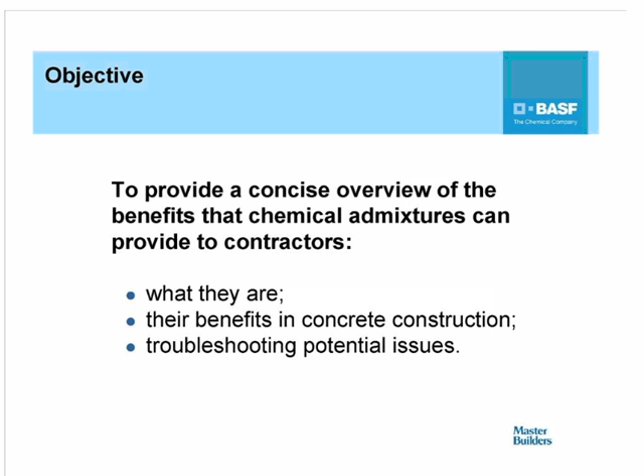So let's start off with the big question: what is an admixture? Believe it or not, there is an official definition for what an admixture is. Essentially, it is any ingredient added to a concrete mixture other than Portland cement, water, aggregates, and fibers. Other than these materials, chemical admixtures can be broken down into two different classifications.

What we call chemical admixtures are typically either in liquid form or powder form, and these materials are typically added in very small quantities relative to the other materials in concrete, such as the Portland cement or the aggregates.

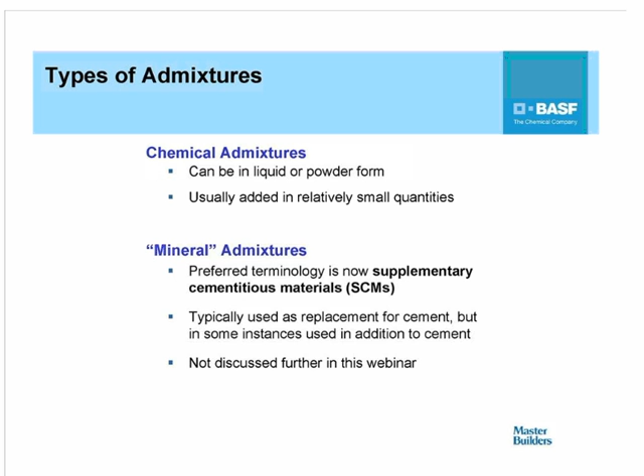In addition, we previously used the term mineral admixtures, which basically referred to what we now call supplementary cementitious materials, or SCMs. These are materials such as fly ash, either Class F or Class C, as well as slag cement, metakaolin, or silica fume. These materials will not be covered in this webinar; the primary focus will be on chemical admixtures.

Now, the big question is, why do we need chemical admixtures in concrete? Well, it turns out we use them to enhance the properties of concrete, and in some cases mortar, in either the plastic or the hardened states.

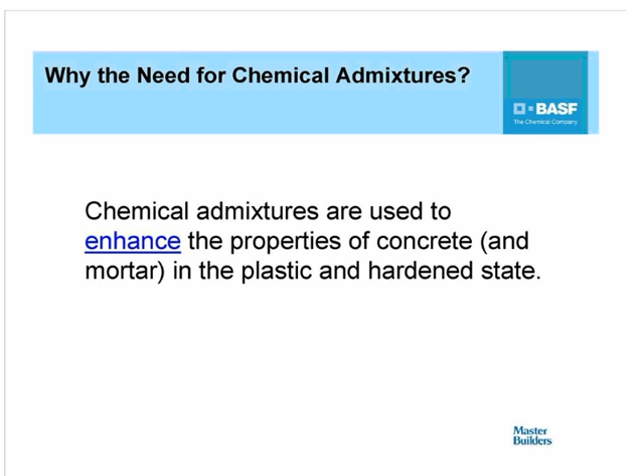The benefits they provide for fresh concrete include: one of the primary reasons chemical admixtures are used is to decrease the total water content of the concrete mixture, with significant benefits that come from doing so. Another reason for using chemical admixtures is to increase the workability of concrete, making it easier to place, consolidate, and finish.

We also use chemical admixtures to either retard or accelerate the time of setting of the concrete, depending on the time or the particular season. We can also entrain air in concrete using chemical admixtures.

Other benefits include reducing segregation, reducing the rate of slump loss, and improving pumpability, placeability, and finishability of concrete. Finally, we can also use chemical admixtures to modify the rate or amount of bleeding that occurs in concrete.

Now, in the hardened state, the benefits of chemical admixtures can be summarized under three bullets: primarily, we can use them to increase strength, to increase durability, or to improve aesthetics.

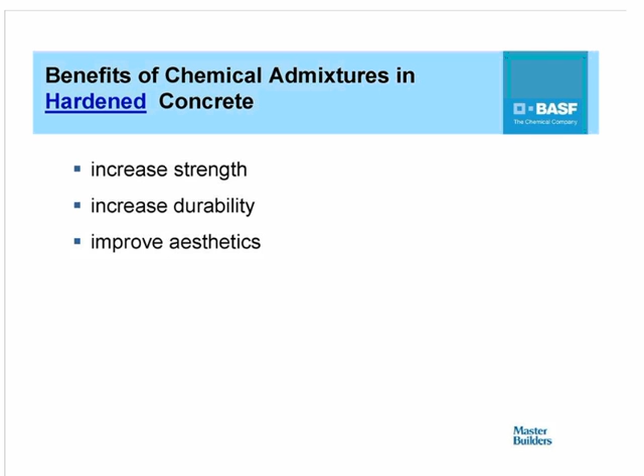Now, these are the main classes of chemical admixtures that exist. I've divided these under water-reducing admixtures, which form the largest grouping of admixtures used, followed by set control admixtures. Then we have a broad class of admixtures that fall under what we call durability enhancing.

These are materials used to help the concrete withstand environmental conditions during service. Finally, there are some miscellaneous chemical admixtures, such as viscosity modifiers and rheology control materials, coloring admixtures, and so on, that also exist.

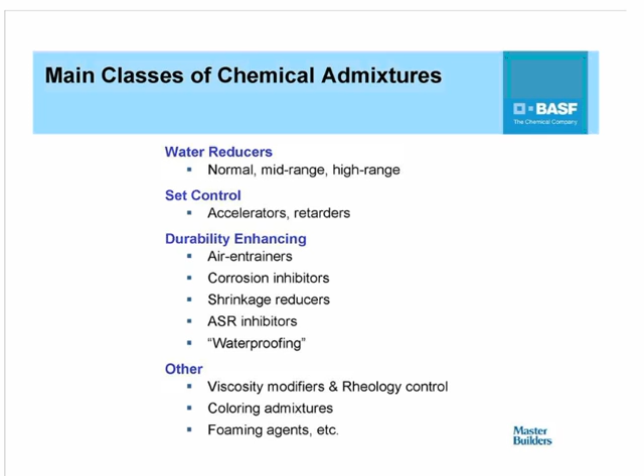All of these admixtures are typically governed by industry standards, specifically the ASTM standards as well as the AASHTO standards for those involved in paving applications. The two main standards that exist for chemical admixtures are ASTM C260, with the AASHTO equivalent being AASHTO M154, and this particular standard covers air-entraining admixtures.

Now, the bulk of admixtures fall under ASTM C494. The AASHTO equivalent is AASHTO M194, and this is basically the main bible for chemical admixtures.

Now, within ASTM C494, there are different types listed, and up until fairly recently there were just seven types, going from A through G. Type A's, as most people call them, are the water-reducing admixtures.

Then we have Type B, which is retarding; Type C, accelerating; Type D, water-reducing and retarding; Type E's, water-reducing and accelerating, so these have accelerating components to them. Type F is water-reducing high-range, and Type G's are water-reducing high-range with retarding components.

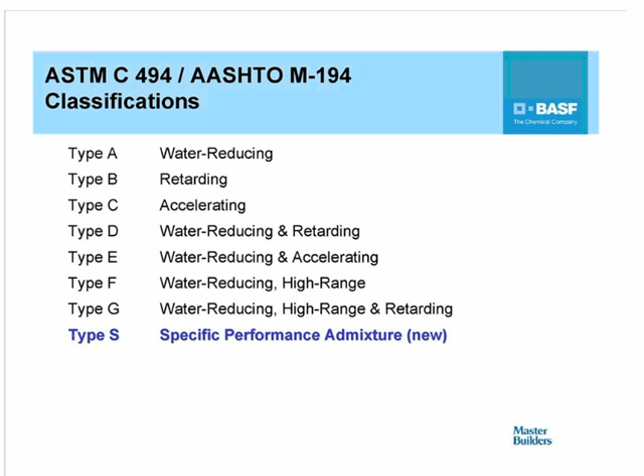Now, several years ago, a new type was added, Type S, for specific performance admixtures. This is supposed to cover admixtures that neither provide water reduction nor affect the setting characteristics of concrete. Under this classification, admixtures such as rheology control or viscosity modifying admixtures, and shrinkage reducing admixtures, will fall under this particular Type S category.

So I'd like to ask the question from the contractor's perspective, since we're trying to do this presentation from the contractor's point of view. I put down a few bullet items.

Most contractors would want concrete that arrives consistently at the job site with the desired slump and air content where applicable. The concrete should maintain slump and workability throughout placement if possible. It's got to pump well and respond well to consolidation and vibration, as well as finish well in flat work applications.

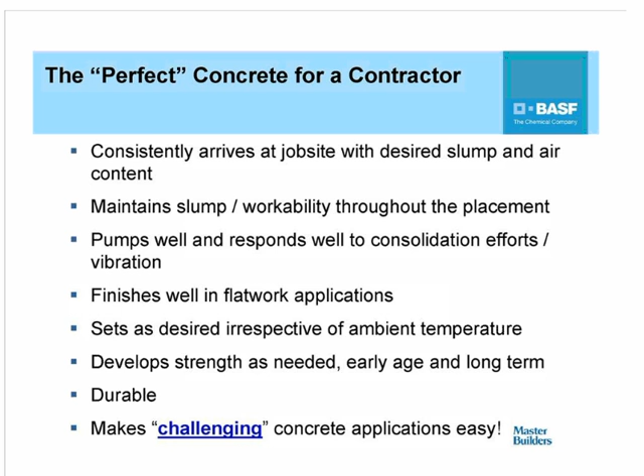Most contractors would also want the concrete to set at the time they like, irrespective of ambient conditions, preferably with the same setting time all year round if working on a project that extends over the seasons. It's got to develop strength as needed, both early age and long term, and it has to be durable. Finally, most contractors would want concrete that makes challenging applications fairly easy.

Now, when it comes to proportioning and producing concrete, there is always a balance between workability and strength. On one hand, the contractor needs workability, both initial and over the placement period, to get the concrete into place without too much problem.

One of the things that helps with workability is adding more water. Before the advent of chemical admixtures, one way of increasing workability was to add more water, or to add more cement to the mix and increase the water content accordingly.

On the other hand, from a strength perspective, the concrete producer wants less water, because reducing water content increases compressive strength, both early age and long term. So it appears as a conflict: the contractor wants more water to improve workability, while the producer wants less water to improve strength.

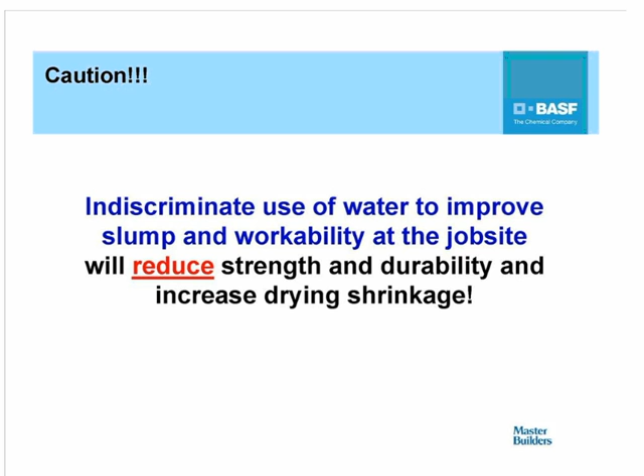At this point I'd like to bring up a caution: the indiscriminate use of water at the job site to improve slump and workability will invariably reduce the strength and durability of the concrete, as well as increase drying shrinkage. So as much as possible, the best approach is to keep the water content as needed and find other ways to improve slump or workability.

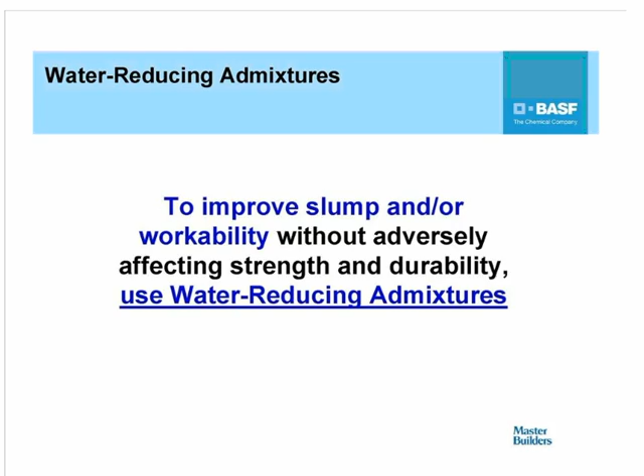This can be done fairly easily through the use of water-reducing admixtures. By using admixtures, we can safely improve slump and/or workability without adversely affecting the strength and durability of the concrete in place. So let's take a look at what these materials are.

As the name implies, water-reducing admixtures are used for the sole purpose of reducing the quantity of mixing water required to produce concrete of a given consistency. That's one of the primary reasons these admixtures are used in concrete.

There are different types of water-reducing admixtures. We have the normal types, which fall under ASTM C494 Type A category, and high-range types that fall under ASTM C494 Type F category. In between, we also have mid-range water-reducing admixtures, which at this point are not covered by any one particular ASTM C494 category, but most of them do meet the Type A category.

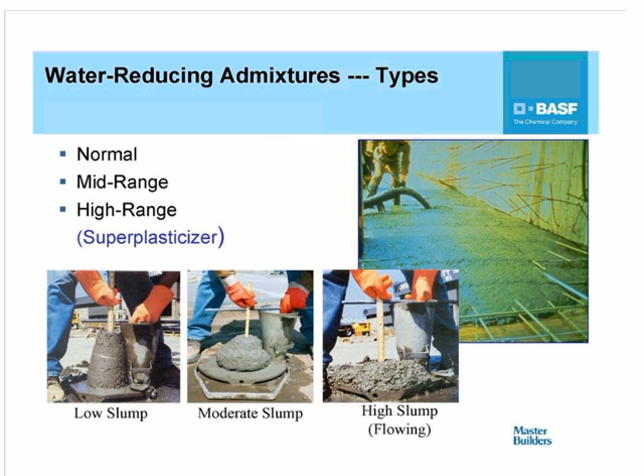With these admixtures, we can produce concrete over a wide range of slumps, from low slumps to moderate slumps to high slumps, as well as self-consolidating concrete.

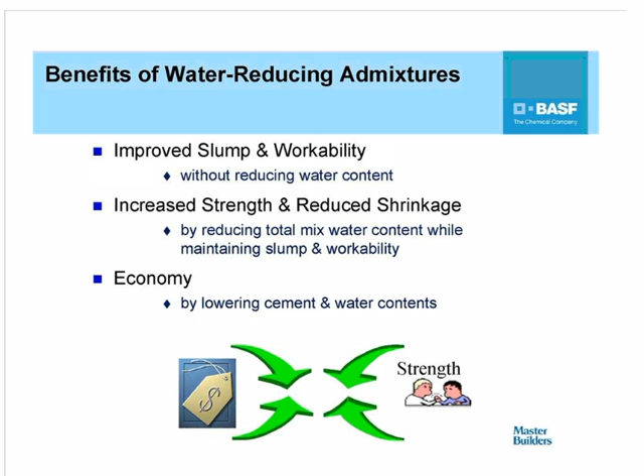The main benefits of water-reducing admixtures can be summed up under three bullets. As indicated earlier, the main purpose is to improve slump and workability of the concrete, and this can be achieved without necessarily reducing the water content. They can also be used to increase strength and reduce drying shrinkage by reducing the total mixed water content while maintaining slump and workability. Finally, they can be used to economize the mix by lowering cement and water contents without necessarily affecting strength and workability.

When we start with Type A, or normal water-reducing admixtures, these by specification have to provide a minimum of 5% water reduction when used in concrete. They're used primarily in concrete that would typically have slumps of no more than about 5 inches, and can also be used synergistically with other types of admixtures within the concrete portfolio.

The typical dosage ranges of these admixtures will be anywhere from about 2 to 5 fluid ounces. In some instances, as we go to higher dosage levels, 4-5 ounces and beyond, we find diminishing returns with respect to additional water reduction. However, as you increase the dosage, you also increase the potential for retardation as well as bleeding.

With water-reducing admixtures based on lignins or lignosulfonate salts, as they're more known, you may also run the risk of increasing the air content of the concrete. Obviously, all of these can have an impact on early age strength development.

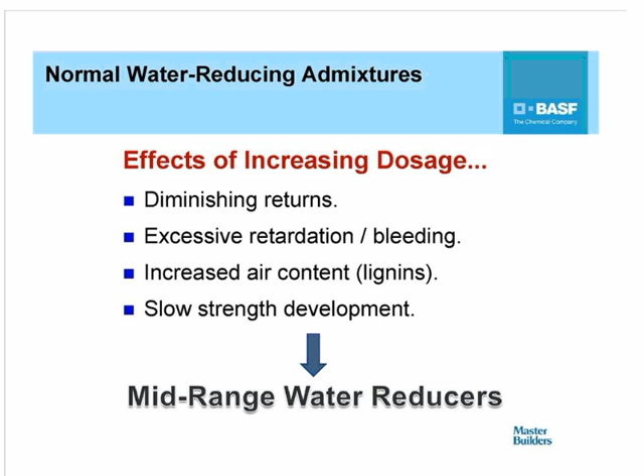This was one of the reasons why mid-range water-reducing admixtures were developed. Even though there's no specification, they typically provide water reduction between that which we get with normal water reducers and what we get with high-range water reducers. So in effect, they provide water reduction between 5 and 15%.

They work extremely well in the mid-range slump of about 5 to 8 inches. The dosages of these materials can range anywhere from about 3 to 15 fluid ounces per hundredweight, depending on the chemistry of the material.

They are designed to have controlled setting characteristics even at higher dosage levels, and can be based on lignosulfonate salts, lignins. Some of the newer technologies are based on newer admixture chemistry, dispersant chemistries, which are the polycarboxylate ether technologies.

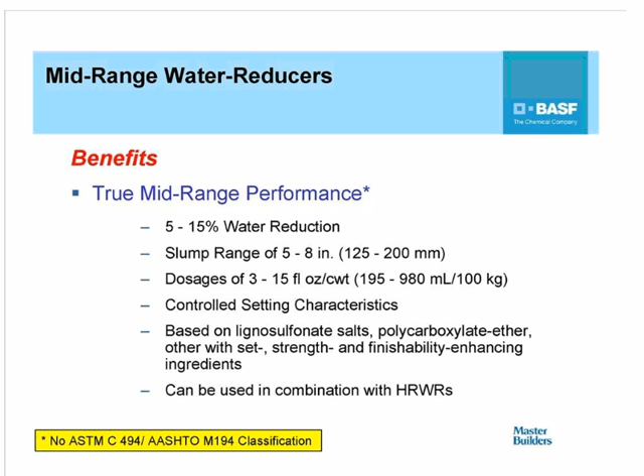In addition, most of these mid-range water-reducing admixtures also contain what we call set balancers, as well as strength and finishability enhancing ingredients. They can also be used in combination with high-range water-reducing admixtures to provide synergistic performance.

The benefits of these mid-range water-reducing admixtures lie in the excellent finishability they provide, especially in lean and harsh mixes, working with supplementary cementitious materials. Mixes that tend to be sticky can benefit from the use of most mid-range water-reducing admixtures. Typical applications for these materials include flat work, curb and gutter, and so on.

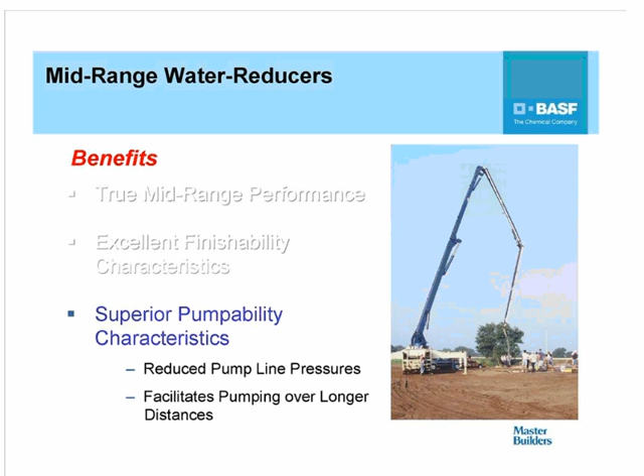One of the other benefits of mid-range water-reducing admixtures is that they provide superior pumping characteristics when used in concrete, which results in reduced pump line pressures and the ability to pump over longer distances because of the effect they have in reducing pump line pressures.

However, there are some potential issues with these materials as well, and these are typically product dependent. This includes retardation at higher dosages, as well as undesirable air contents when they're used at relatively high dosages.

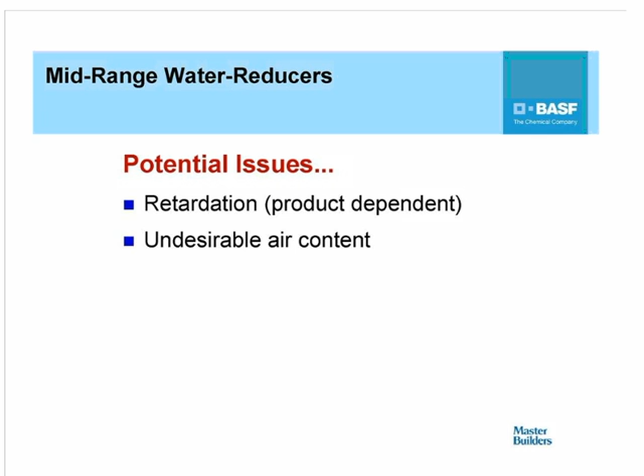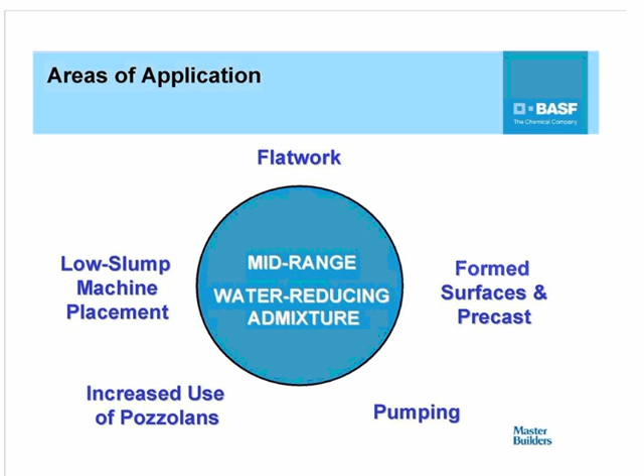So these are just some issues that are typically looked out for with the use of mid-range water-reducing admixtures. But for the most part, they're used very widely within the industry in applications that range from flat work, formed surfaces and precast, pumping, low slump machine placements, as well as areas where increased use of pozzolans occur. This is again because of the impact they have in reducing stickiness of concrete in the mixes.

Now the last category under water-reducing admixtures is the high-range water-reducing admixtures, or as they're more commonly known within the industry, superplasticizers. These admixtures, by specification, have to provide a minimum water reduction of 12% when used in a concrete mixture. Most of them actually provide water reductions much greater than that, and in extreme cases we can get as much as 40% reduction in total mixed water content.

The main benefit of high-range water-reducing admixtures is that they're used in producing flowing concrete, so these are concretes that have slumps of 7.5 inches or greater.

The ideal slump range for most of these materials will be 8 inches or greater. And they can be added either at the batch plant or at the job site.

Initially, when these materials were developed, based on first and second generation technologies, they were based on lignosulfonate salts, which had very short pot life. As a result, job site addition was the preferred method, because once added and mixed into the concrete, it could be placed right away.

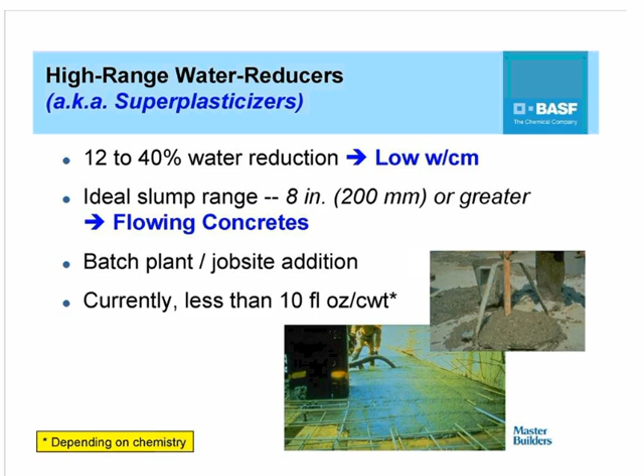The main benefits of high-range water-reducing admixtures lie in the fact that they provide significant water reductions, as we saw on the previous slide, anywhere from about 12 to 40%. As a result, they are the main admixture of choice in producing high early as well as high ultimate compressive strength concrete.

They are also the admixtures of choice when producing concrete with low permeability or increasing durability. And they provide more effective use of cementitious materials in concrete.

In addition, the other benefit of high-range water-reducing admixtures is that they can be used to provide high slump and workability, which can result in faster discharge, pumping, and placement of concrete, as well as reducing the effort required to vibrate concrete in place.

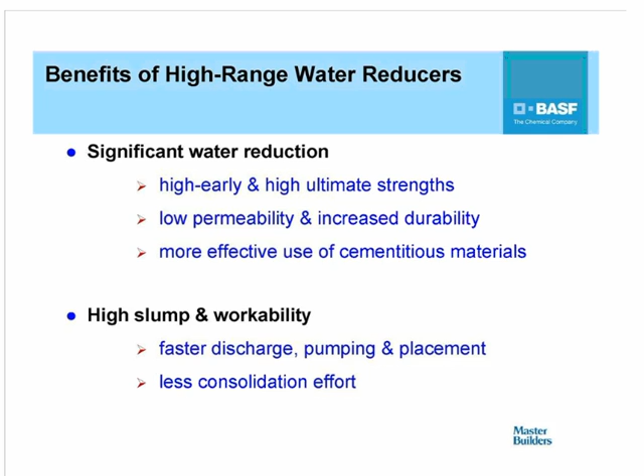However, just like any of the other admixtures I talked about so far, there are some potential issues, which could be segregation if the dosage used is not in balance with the total water content of the mix.

In addition, especially with the older technologies, high-range water-reducing admixtures can potentially lead to some amount of retardation. This is not that much of an issue these days with the newer polycarboxylate ether technologies.

Also, high-range water-reducing admixtures, when used at lower slumps, can lead to erratic performance. Years ago, some state agencies would permit the use of high-range water reducers but then limit the slump to no more than 5 inches, which created a lot of havoc with respect to slump and performance.

These days, I think most agencies understand that these materials have to be used at much higher dosage and much higher slump levels, and are open to that.

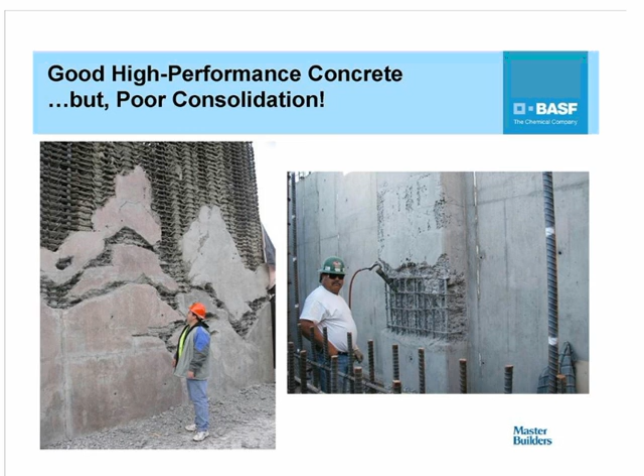Now, obviously, having high slump does not necessarily mean that we may be able to achieve extremely good consolidation in the forms, depending on how congested the reinforcement is. One of the things this has led to, facilitated by high-range water-reducing admixtures, is self-consolidating concrete.

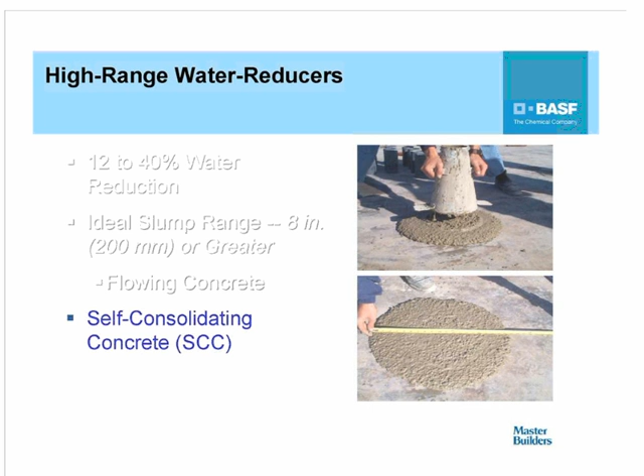Self-consolidating concrete, by definition, is a highly flowable, non-segregating concrete mix that can flow into place, fill the formwork, and essentially encapsulate the reinforcement without any mechanical consolidation, or, if required, very, very little mechanical consolidation.

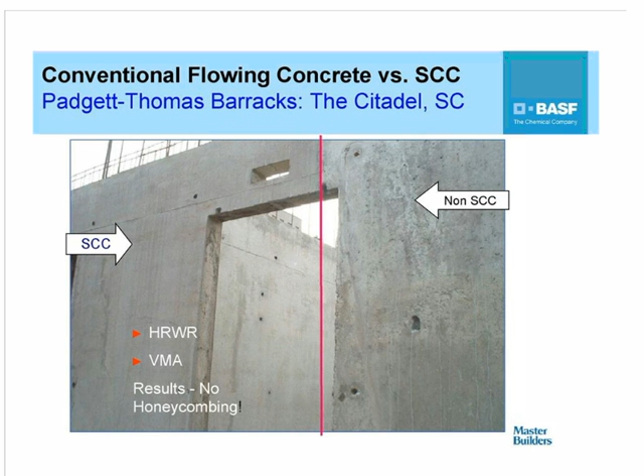With self-consolidating concrete, the surface finish can be significantly enhanced, and sharper edges can result, even though the concrete may not be vibrated. On this particular project, where there were a lot of architectural details, the use of self-consolidating concrete resulted in extremely good finish in the final structure.

Self-consolidating concrete has also been used, and is being used quite extensively, in mat foundations. It was used on the Burj Khalifa in Dubai, and in the U.S., Skidmore, Owings & Merrill specified it for the Trump International Tower and Hotel project in Chicago back in 2005, where a total of 4,600 cubic yards of self-consolidating concrete was placed in 22 hours continuously. The mat was 198 feet long by 60 feet wide and 10 feet deep.

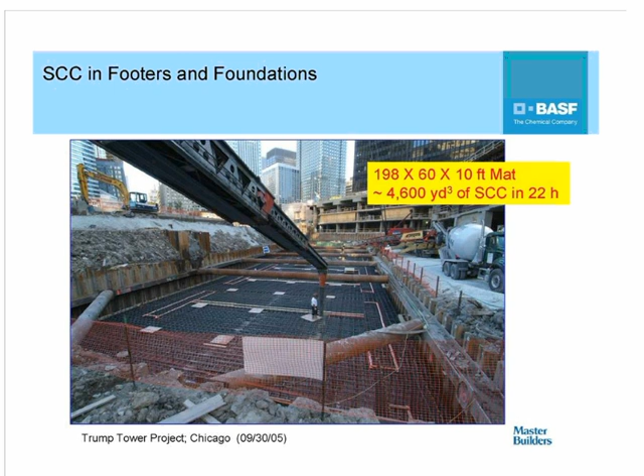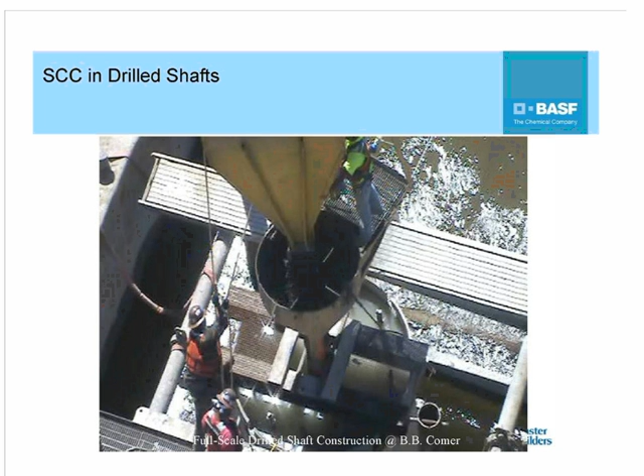With self-consolidating concrete, it's been shown that the concrete can rise uniformly within the shaft because of the high fluidity of the mix, resulting in very, very few defects.

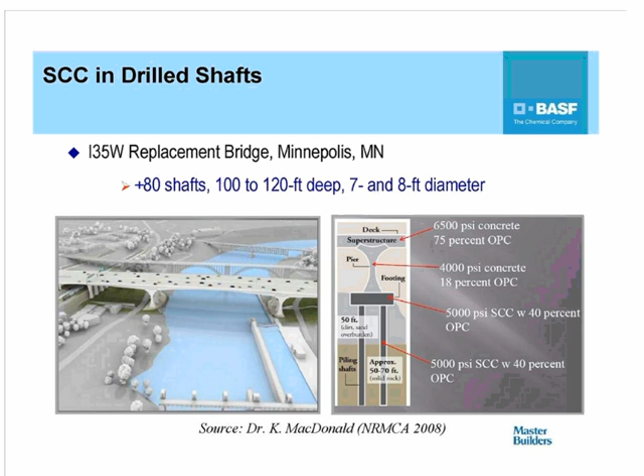One of the projects where self-consolidating concrete was used extensively was the I-35 West Replacement Bridge in Minneapolis, Minnesota, a few years ago, where all of the drill shafts on this particular project were basically cast using self-consolidating concrete.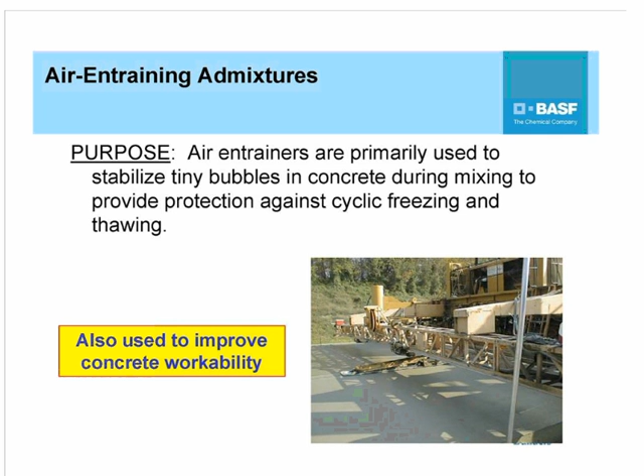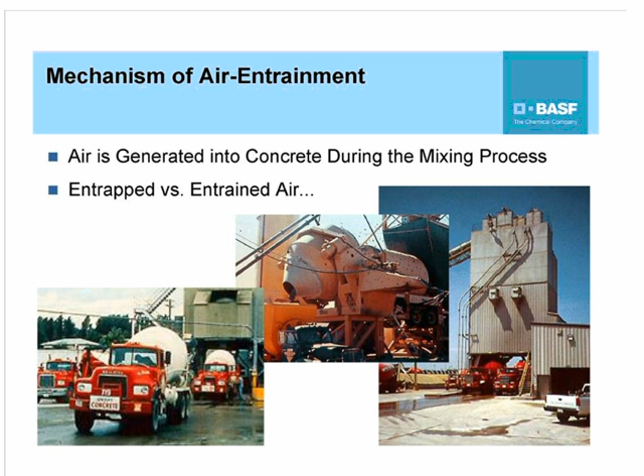Air entraining admixtures also help improve the workability of concrete because of the ball-bearing effect they provide. The air is generated into the concrete during the mixing process when air entraining admixtures are used, and they form air bubbles that are spherical in nature, as opposed to the irregularly shaped, larger entrapped air voids that don't provide any benefit when it comes to cyclic freezing and thawing.

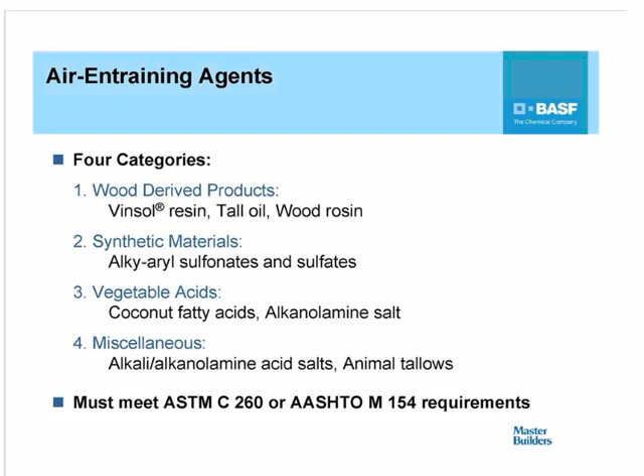There are different types of entraining admixtures in the marketplace, and entrainers are governed by ASTM C260. The entrainers in the marketplace can basically be classified under wood-derived products as well as synthetic materials. Both of these have their benefits and slight disadvantages.

With the Vinsol resins or wood-derived products, you get quick air generation, but minor air gain with continued mixing. However, over time, air loss can result with prolonged mixing. These vinsol resins and rosins tend to form mid-sized air bubbles, and most of them are formulated and compatible with most chemical admixtures used in concrete.

The synthetic materials also generate air quickly, but they're not as effective in very low slump mixes, such as those used in paving applications. These synthetic materials will have minor air loss with mixing. They generally form much smaller, very stable air bubbles when used in concrete, and they may be somewhat incompatible with some high-range water-reducing admixtures, depending on the particular chemistry.

But both of these chemistries, either the vinsol resins or the synthetic materials, are very effective in producing concrete that has very good freeze-thaw resistance.

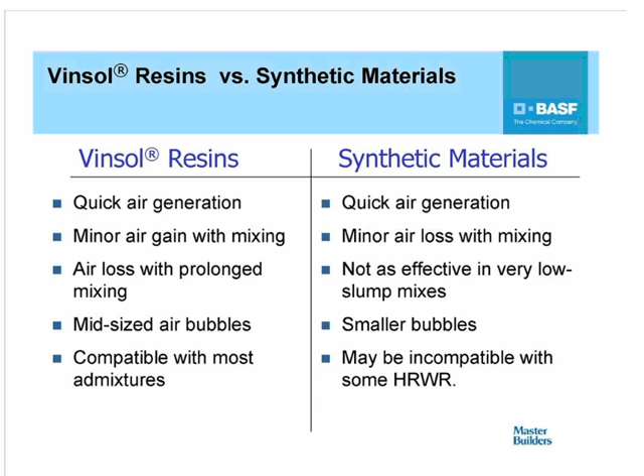The benefits of air entraining admixtures in plastic concrete include improving workability, increasing slump, reducing segregation and bleeding, producing a more cohesive mix, and in some cases, reducing the density of concrete.

In hardened concrete, the main benefit is improving resistance to freeze-thaw distress, as well as scaling due to de-icing salts. They also produce a slight decrease in permeability, which can improve water tightness as well as sulfate resistance. But for the most part, if we're interested in reducing permeability, there are more effective ways of doing so with high-range water-reducing admixtures and supplementary cementitious materials than using air entrainers.

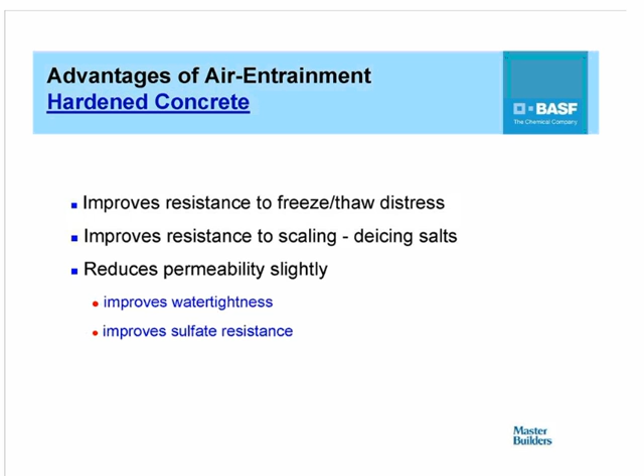Now, the disadvantages of air entraining admixtures in concrete include the fact that sometimes the mixes can be sticky, and because of the air bubbles, they tend to reduce the amount and rate of bleeding.

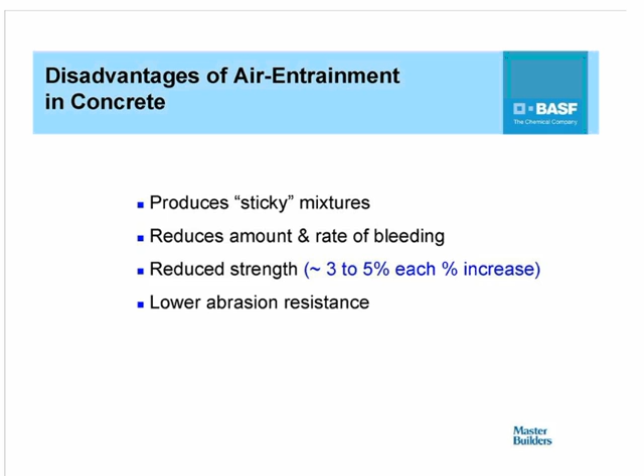In addition, air entrainment can reduce the strength of the concrete, approximately 3 to 5% for every percent increase over and above what the concrete was designed for. And entrainers may also lower the abrasion resistance, depending on the effect they have on compressive strength.

With respect to things that affect entrainment, anyone who's ever worked with entrained concrete knows that it's extremely touchy, and pretty much everything you can think of can affect entrainment in concrete. This includes things from the batch plant, such as aggregate gradation, cement changes, and the use of supplementary cementitious materials, especially class F fly ash, depending on carbon content. At the job site, things such as the addition of water, high-range water-reducing admixture, pigments, fibers, and pumping can also affect entrainment, especially if there's a vertical drop at the end of the pump line.

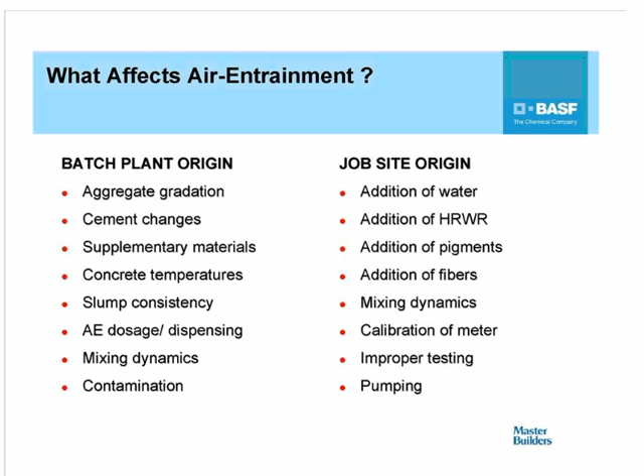Temperature affects the hydration of Portland cement, meaning that in summertime concrete tends to react much faster, and in wintertime it reacts a little slower. As a result, in summertime some issues that can arise include increased water demand and rate of slump loss, an increase in the potential for retempering at the job site, a higher potential for plastic shrinkage cracking, and if there are delays, the potential for cold joints. In addition, because of higher temperatures, concrete tends to set faster, which can lead to problems with placing, consolidating, and finishing the concrete.

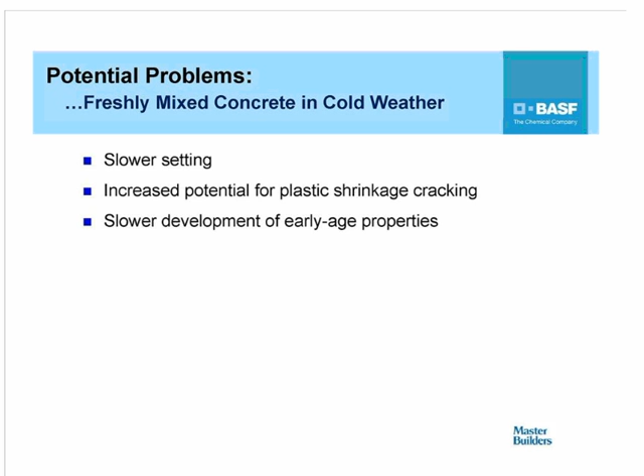With respect to cold weather, the exact opposite tends to happen. The concrete sets slower, and this can increase the potential for plastic shrinkage cracking if the surface of the concrete and flatwork is not protected. In addition, strength development, especially early age strength development, will tend to be impacted as well.

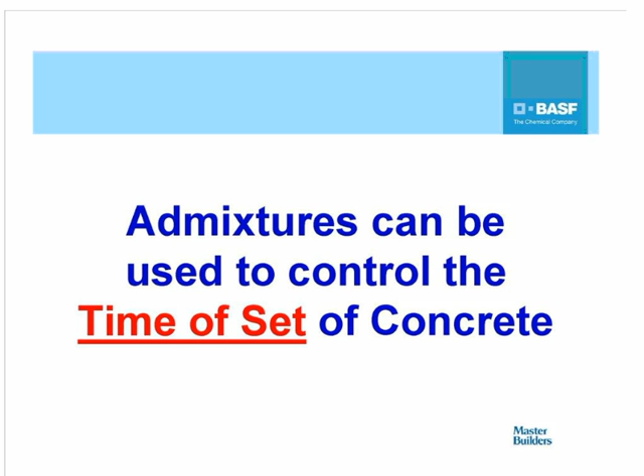As a result, we use admixtures to control the time of setting of the concrete. These admixtures are basically called set control admixtures, and they're used to modify the setting and strength development characteristics of the concrete. They fall under two groupings: retarders and accelerating admixtures.

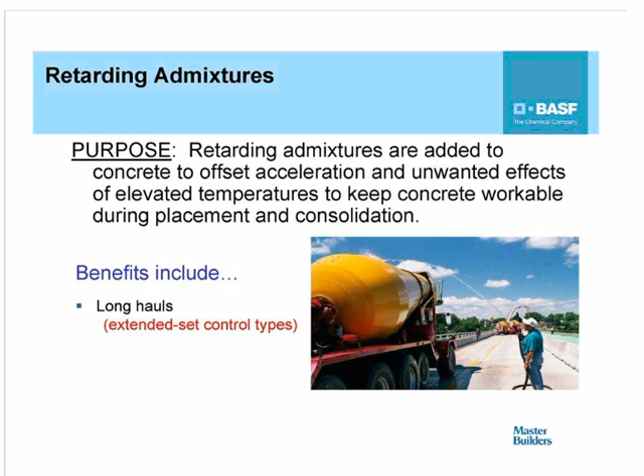Retarders are basically used to offset the acceleration that can occur under hot weather conditions. Some of the benefits include also long hauls, depending on the type used. When I talk about long hauls, I'm not necessarily referring to distance. It could be that even in an urban environment, due to traffic congestion, it takes a longer time for concrete to be transported from the batch plant to the job site.

But the benefits of these retarding admixtures include minimizing the potential for cold joints, and providing sufficient time for finishing operations in hot weather. In bridge deck applications, they permit full form deflection before initial set of the concrete.

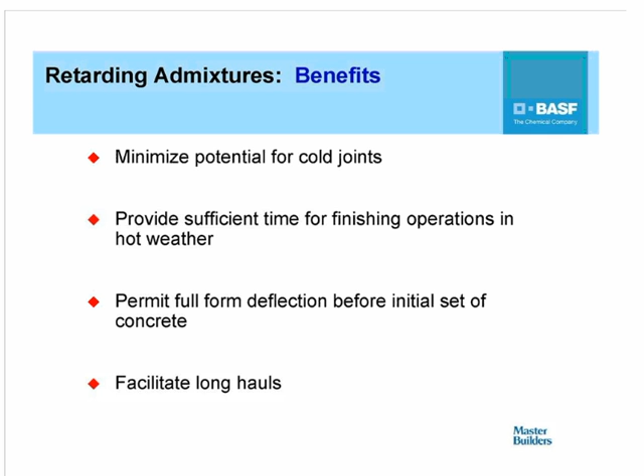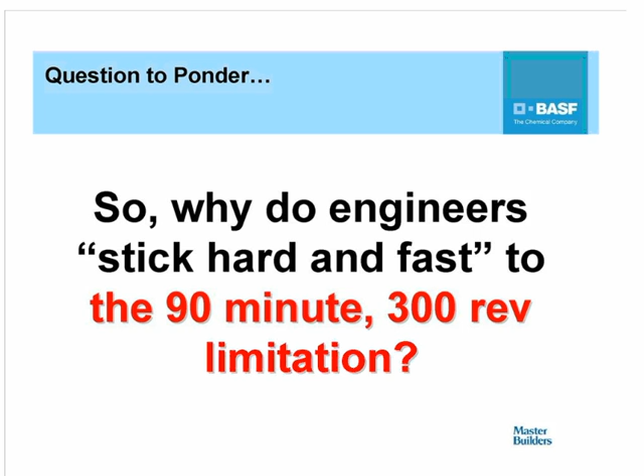So my question to you is, why is it that engineers stick hard and fast to the 90-minute, 300 revolution limitation, when obviously within the industry there are technologies that can be used to permit placement of concrete way beyond these particular limits?

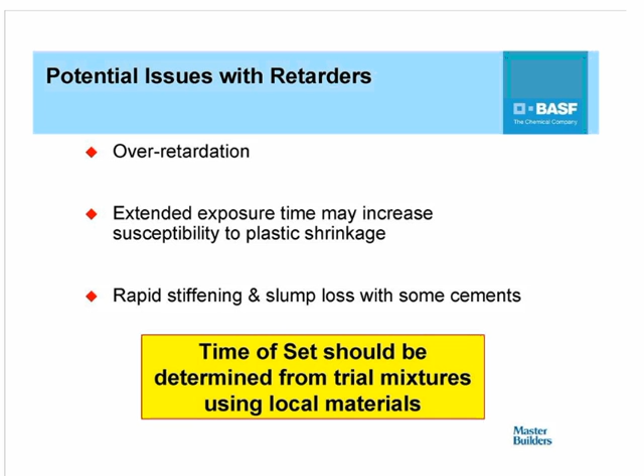With respect to potential issues with retarders, the potential for over-retardation exists if there's an overdose of admixture, or depending on the other constituent materials that go into the mix. In addition, extended exposure time may increase the susceptibility of flatwork to plastic shrinkage. But one of the more common problems that sometimes occurs is rapid stiffening when a retarder is used, and slump loss associated with that, depending on the cement chemistry and the type of material being used. So even though retarders are supposed to extend the time of setting, sometimes with some cements you could have the exact opposite happening, where you end up with rapid stiffening.

Accelerating admixtures, on the other hand, are used to do the exact opposite. When the weather cools down, accelerators are added to concrete to shorten the time of set and also to accelerate early age strength development. The main types are chloride-based admixtures, which are very effective and are typically used in residential, non-reinforced applications. But for reinforced concrete applications, non-chlorides exist, and within the non-chlorides there's a subcategory used in sub-freezing ambient temperature environments.

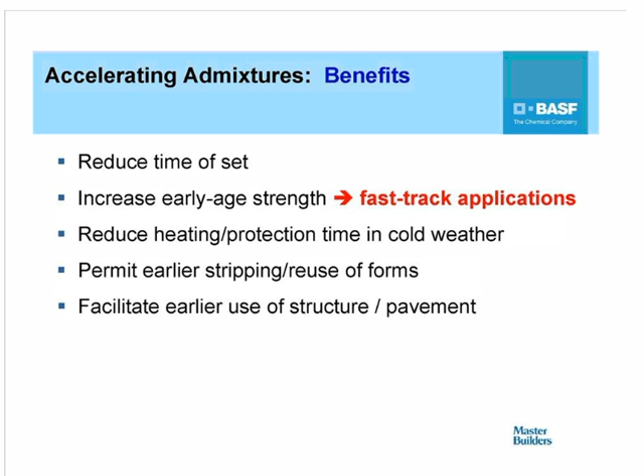The main benefits are to reduce the time of set of concrete, to increase early age strength development, which will then permit earlier stripping and reuse of forms. These can also help reduce protection or heating requirements that may be needed in cold weather applications, and overall they facilitate the earlier use of a structure or a pavement.

Now, consistency was one of the things that I indicated will be the desirable thing with respect to a perfect concrete for a contractor.

One of the things we know, especially when we're slumping at the job site, is that we're playing with the consistency of the mix. Now there is a workability retaining admixture in the marketplace that was developed back in 2009, so we're talking about 4 years ago. It provides varying degrees of workability retention depending on the dosage used.

The main benefit of the workability retaining admixture is that unlike a retarding admixture, it does not retard the time of set of the concrete, and as a result does not impact early age strength development. It's primarily used in moderate to high slump concretes, including self-consolidating concrete, but it's also been used in lower slump concrete mixes. Here's some performance data I'd like to share with you.

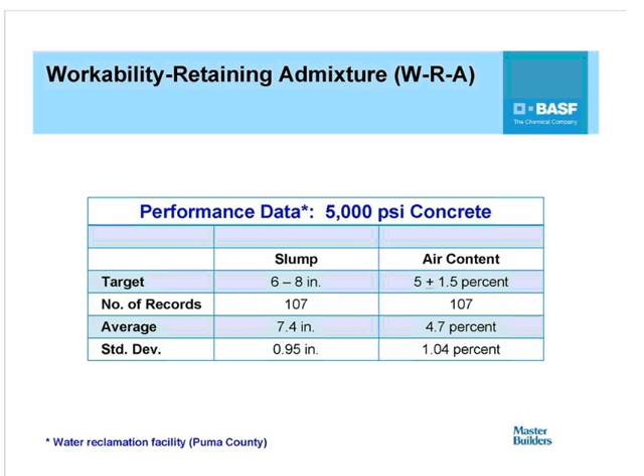This was a project where the specified compressive strength was 5,000 psi, but more importantly, the target slump was 6 to 8 inches, and the target air content was 5 plus or minus 1.5%. The average of 107 records was an average slump of 7.4 inches and an air content of 4.7%. Needless to say, the contractor on this project was extremely pleased with the performance of the concrete, as was the concrete producer.

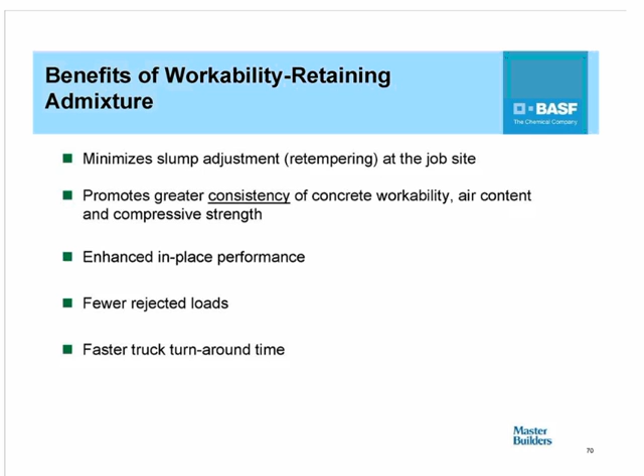So just to summarize, the benefits of the workability retaining admixture basically lie in the fact that it helps to minimize slump adjustments or retempering at the job site, and as a result promotes greater consistency of concrete workability, air content, and compressive strength, which enhances the in-place performance of the concrete mix and leads to fewer rejected loads as well as faster truck turnaround time.

Now let's switch gears and talk about durability enhancing admixtures, because we've already covered water reducers, air entrainers, as well as set control admixtures. But what we see in specifications now more and more are also durability enhancing admixtures. These materials are added to concrete primarily to improve concrete durability.

They include air-entraining admixtures that I've already covered, as well as lithium admixtures for mitigation of alkali-silica reaction, corrosion inhibitors, shrinkage reducers, and waterproofing admixtures. So these are the common durability enhancing admixtures currently being used in the industry.

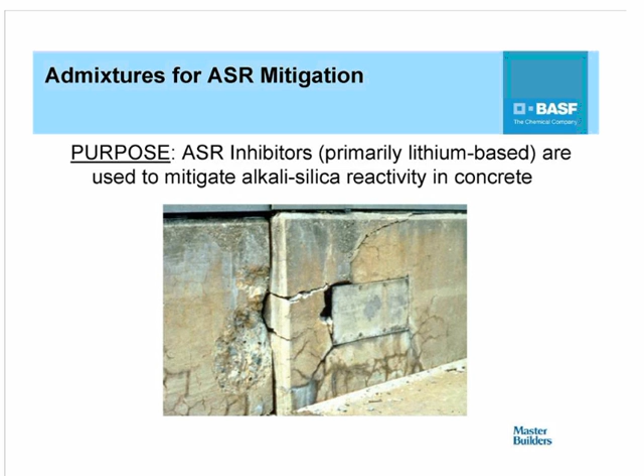Let's start off with the admixtures for mitigation of alkali-silica reaction. Alkali-silica reaction is a very destructive reaction that occurs in concrete due to a reaction between the alkalis in the cement and reactive silica that may be present in some of the aggregates that are used. There are various ways of mitigating alkali-silica reaction, but from an admixture perspective, lithium-based admixtures are

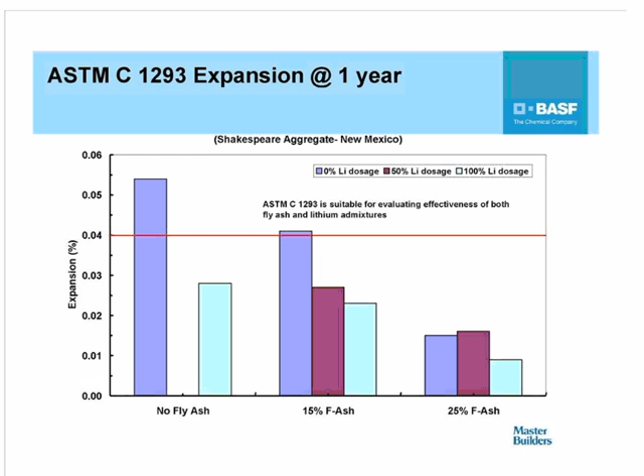very effective in doing so, as shown in this particular graph. However, one thing to keep in mind is lithium-based admixtures are very expensive, but the good news is they work synergistically with certain pozzolans, in particular Class F fly ash, slag cement, as well as metakaolin. They can be used in combination with these materials to provide economical solutions to alkali-silica reaction in concrete.

I think I skipped a slide.

The next group of durability enhancing admixtures will be the corrosion inhibiting admixtures, or corrosion inhibitors, which are added to concrete primarily to mitigate chloride-induced corrosion of the reinforcement. Now, the main chemistries used in the marketplace are a 30% solution of calcium nitrite, as well as an organic solution of amines and fatty acid esters.

Now, these materials work differently. The calcium nitrite is typically used at dosages ranging from about 2 to 6 gallons per cubic yard. In most applications, such as parking garages, anywhere from about 3 to 4 gallons is typical. In marine applications, you get into the higher dosages of around 5 gallons per cubic yard. The aqueous solution of amines and fatty acid esters is typically used at an optimized dosage of 1 gallon per cubic yard.

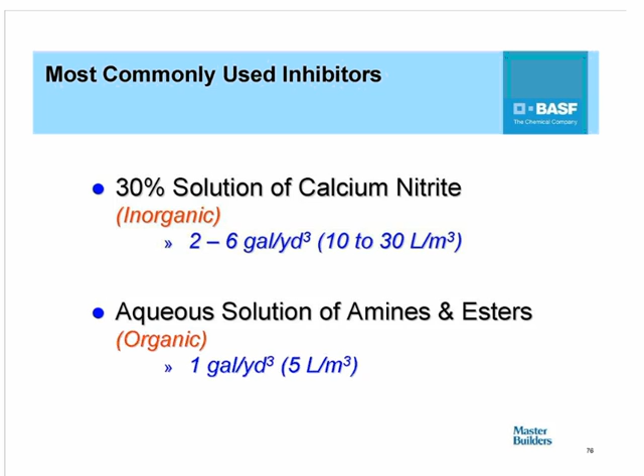Now, the main benefits of calcium nitrite is the fact that it can be used with admixed chlorides, and it also accelerates the time of set of concrete. So as a result, in the wintertime, it can double as an accelerator without having to add an additional accelerator to the mix.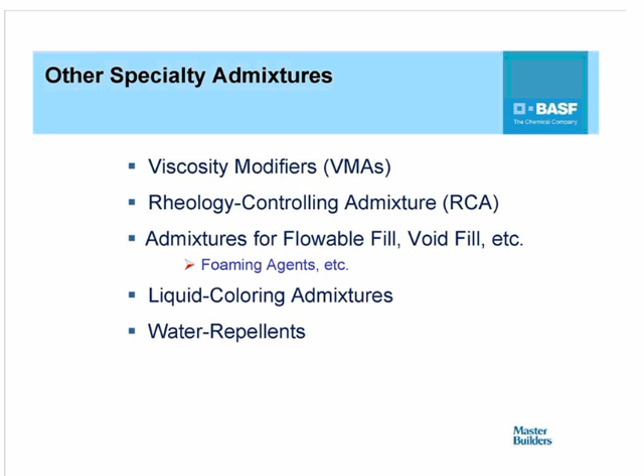I'd like to talk about a couple of challenging projects where admixtures really enabled these to take place. The One World Trade Center building in New York City was recently completed, with the antenna added on top. This project consists of 4 high-rise buildings, the 9/11 Memorial, and a transportation hub.

What's unique about the concrete used in this project is that up to 74% of the Portland cement was replaced with supplementary cementitious materials—a combination of fly ash, slag cement, and silica fume. The concrete was designed for strengths ranging from 4,000 psi to 14,000 psi in some applications, and all of it was basically self-consolidating concrete.

In this mix design, the supplementary cementitious materials for the 3 mixes shown ranged anywhere from 65% to 70%. But the system of admixtures used essentially allowed the concrete to be pumped all the way up 90 stories without any problems, and for the strength to develop without too much issue.

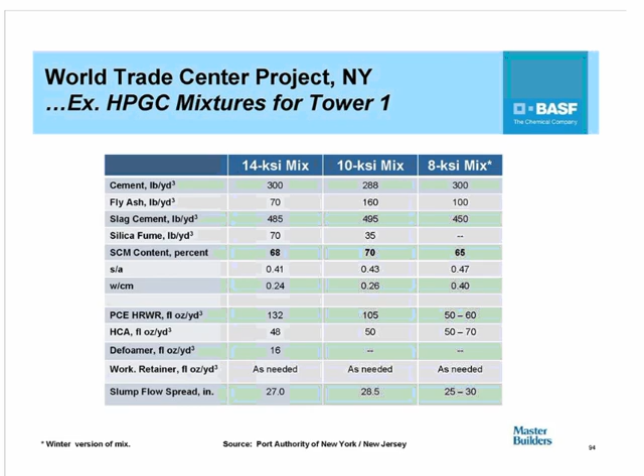As a result, One World Trade Center won the Concrete Producer Reader's Choice Award in 2010 for the use of high-performance green concrete. This was as green as you could get the concrete to be.

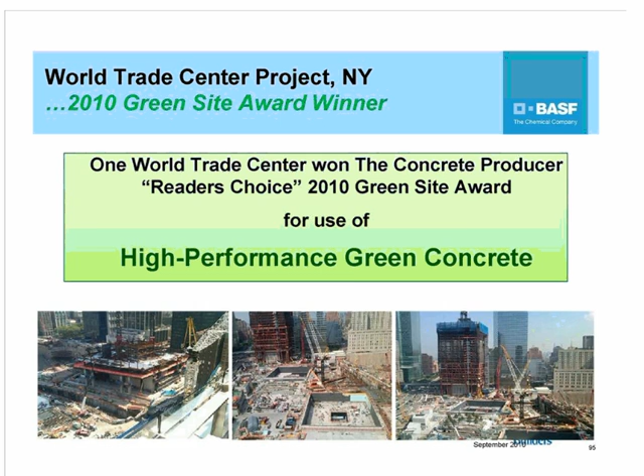Admixtures are also used in innovative high-performance concrete applications such as strength on demand. These concrete mixes yield very high strength shortly after placement, typically within 3 to 4 hours. As a result, they lend themselves well for replacing deteriorated sections of concrete pavements or in other industrial facilities. Again, it's the system of admixtures that allows this to take place.

Now I'd like to end by touching on addressing incompatibility between concrete materials, because when issues arise at the job site, the typical tendency is to assume there's something wrong with the chemical admixture. But incompatibility occurs between concrete materials, which can lead to issues such as rapid stiffening, undesired air contents, excessive retardation, sometimes higher admixture costs to address the issue, or other collateral effects such as cracking or low strength.

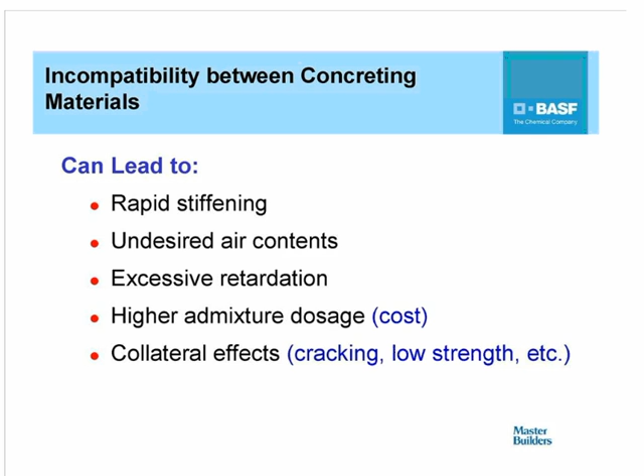Typically this can be due to any of the materials that go into making concrete—either the cementitious materials, the chemical admixtures, sometimes the aggregates, or even the water used. And of course, Mother Nature can sometimes play havoc. We occasionally run into situations where the mix works well one day, and the next day something doesn't go right, sometimes due to the effects of ambient conditions.

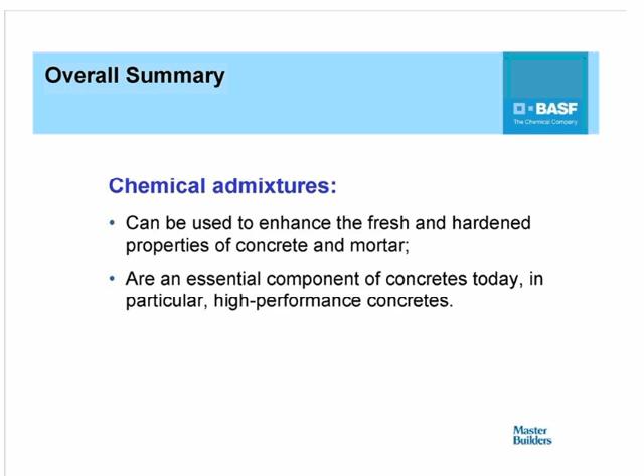So to summarize, chemical admixtures can be used to enhance the fresh and hardened properties of concrete and mortar, and in concreting today they form an essential component of concrete mixtures, particularly when we talk about high performance concrete. Depending on the desired property, there is or will be a combination of chemical admixtures that can be used to provide the property desired by the contractor, the owner, and the specifier.

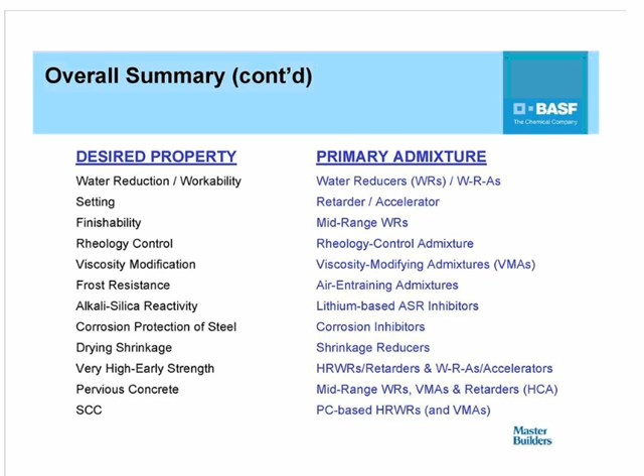Okay, thank you. So I believe at this point in time, Laura, I think we can take questions.